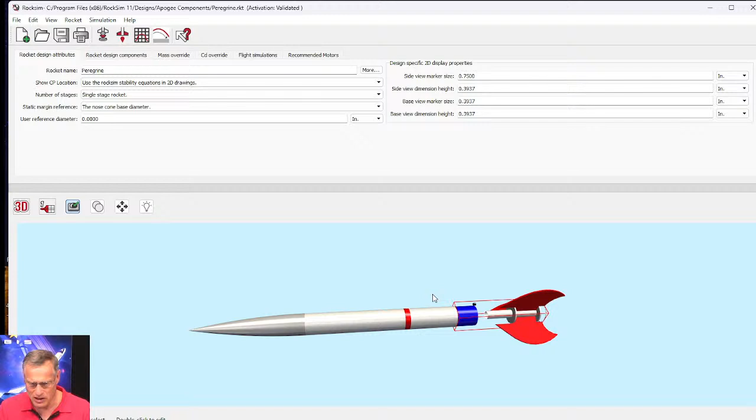While it's moving around, sometimes you might get these wireframe boxes - that's just your graphics card trying to keep up. Anyway, so this is a dual deployment rocket. I'll go back to 2D.

We've got 2 parachutes for dual deployment. The P right here is a parachute, and there's another parachute right here. If you click on them, you can see - that's a mass object, but this one right here is the parachute. So there's a mass object and a parachute, and probably the mass object is going to be like the shock cord.

You can tell that if you click on it, then come up here to Rocket Design Components at the top, click on that, and it will highlight what you're clicking on down here. So this tells me that this mass object is a shock cord. If I go to this one, that's also a shock cord. And if I click over here, this is a 48-inch parachute.

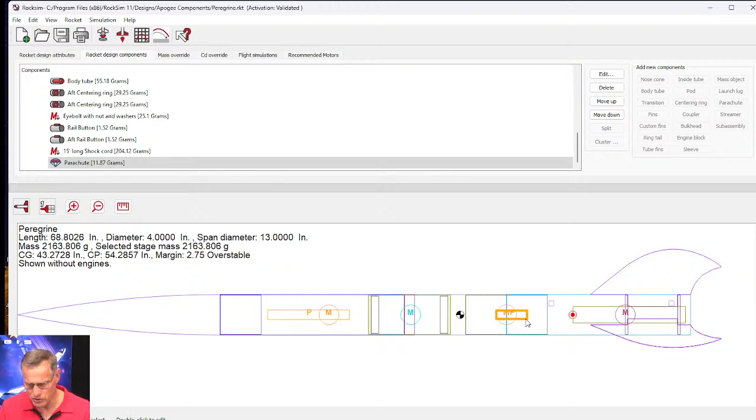And then this one over here is another parachute, but I don't know the diameter. So let me take a look at it by double-clicking it, and that will open up the editor screen. This editor screen will give me basic information about this parachute, and I can tell it's an 18-inch diameter parachute.

So I'm going to come up here and change the name to 18-inch parachute so that I know what it is. So when I go back to the parts tree right here, you can see, yep, this is an 18-inch parachute. That's going to help you a lot. So now we need to load an engine, because now we're going to set it up for dual deployment.

So we're going to load an engine. To do the loading of engines, come up here for the Prepare for Launch button, this button here at the top. It's like the bottom of the rocket with two arrows pointing down to the launch pad, meaning we're going to load it onto the pad. So click Prepare for Launch, and it brings up this screen.

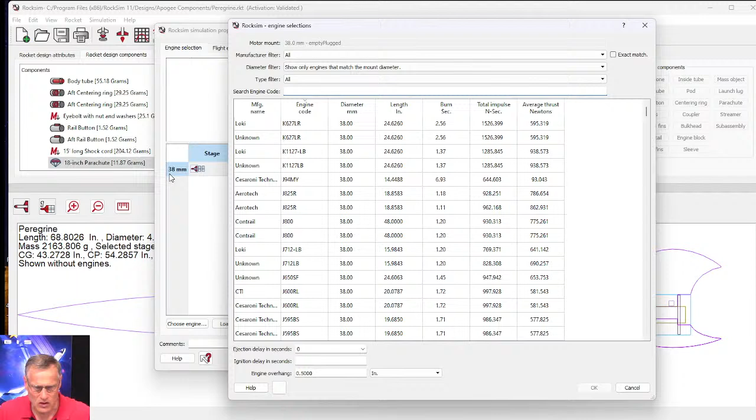Now we're looking at the back end of the rocket, and it's looking for a rocket motor. So if you look at the back end of the rocket, you say, how do you load a motor? Well, you come down here to this button that says Choose an Engine. You click on that, and it brings up a list of engines that will fit this rocket. If I look over here where this engine is going to go, it tells me it's a 38 millimeter diameter engine, and so it's looking at all the motors in the database that are 38 millimeters. I can scroll through them and just pick one.

Doesn't really matter for me for this, so I'm going to just choose this engine right here, a J570W. The W stands for white, so it's a white lightning motor, and it's going to give me a white flame.

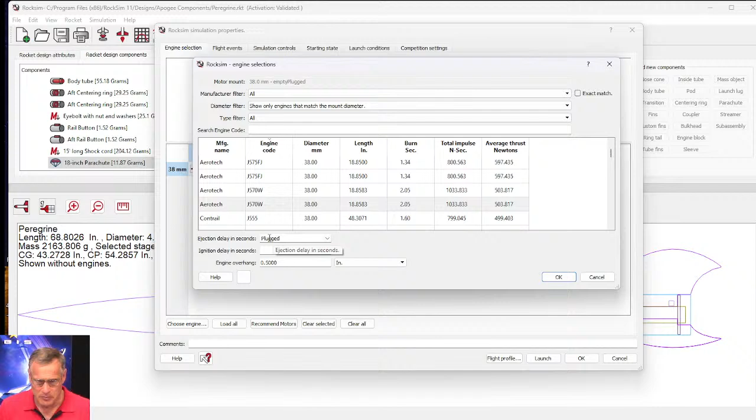And then I'm going to choose an ejection delay. For dual deployment, the altimeter controls everything, so I don't even need to have an ejection delay. So I could say plugged, or if I want to use the ejection charge as a backup, I can choose an ejection delay. But RockSim is going to ignore this once we set it up for dual deployment, so don't worry about it. I'm just going to choose plugged for right now. Plugged means there's no ejection delay. And then I'm going to click OK.

And it loaded that motor, and you'll see that the back end of the rocket is now filled. That brown spot right there, that's our rocket motor. We have the J570, and it says a 0-second delay, but I want it plugged, so there it is, plugged. And if you look over here on the side, it now shows that the engine loaded is a J570W-plugged, which is okay. So now we're ready to set up the dual deployment, and you do that in the flight events.

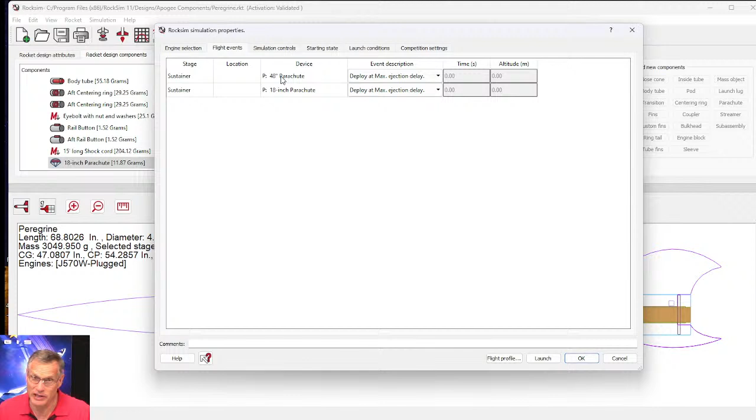So here in the flight events, I have two devices. I have a 48-inch parachute, that's our big one, and then we have our 18-inch parachute. And this is why I renamed it, because when I'm looking at these devices, I want to be able to tell them apart, because if they're both named parachute, I don't know the sizes.

So our smaller parachute is our drogue chute, and we want it to come out at the top of the flight trajectory. That's called the Apogee point. So I'm going to go here to the description for that event - this is like the triggering event, what causes the parachute to come out. I'm going to click on the drop down, and I want to choose Deploy at Apogee. So this parachute is going to come out at Apogee.

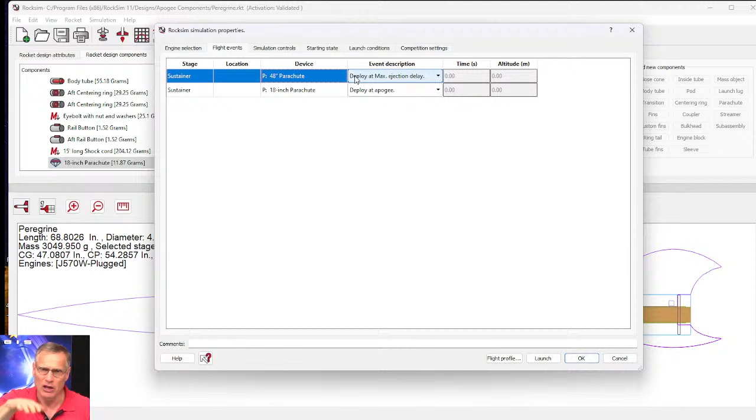And then this bigger parachute, we want to deploy that one at a lower altitude. The purpose of dual deployment, as you know, is to save us from walking a long way. We want the small parachute to come out at Apogee so that the rocket will fall fast until it gets to a lower altitude, and at that point we want it to fall slow. Once it's falling slow, the wind is going to start carrying it, so the lower it deploys, the shorter distance it's going to drift. And we can tell that by this right here.

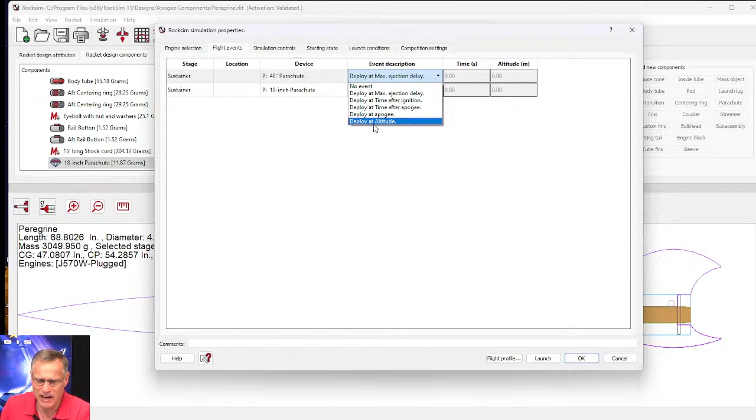So we're going to go to the event description again, and we're going to set it at an altitude - deploy at an altitude. If you come over here, you'll see that this box is now activated, and I can type in my altitude. Right now I'm in meters, so I'm going to say 100 meters, which is a little over 300 feet. You can change the units, and I can show you that if you're interested. So this parachute is going to deploy at 100 meters.

And now we're ready to launch. We've set up dual deployment. Dual deployment is now set up. Now we need to go launch.

So I'm going to look at my starting state. My launch guide length - this is an 8-foot launch rail, so I'm going to type in 98 inches for the length. And if I change that to feet, you can see that's 8 feet, 0.166. I think it should have been 96 feet - 96 inches.

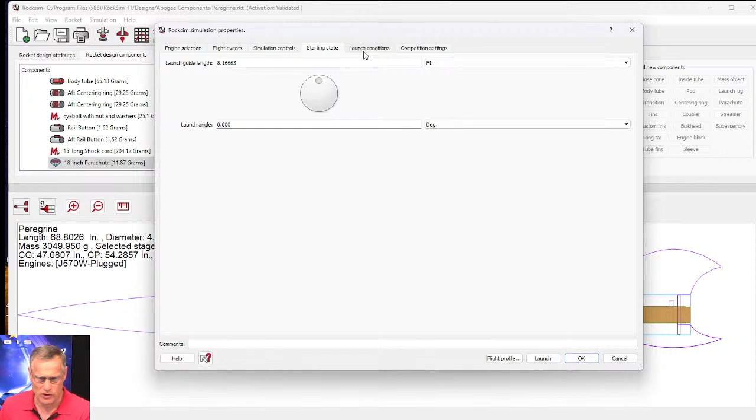We're going to go straight up, so our launch angle is 0 degrees, pointing straight up. Under launch conditions, we're at an altitude of 700 feet, standard atmosphere day. We do have wind, 8 miles an hour. This one should also be 8 miles an hour. So if both the low wind speed and the high wind speed are the same, that means it's a constant wind speed, not varying between fast and slow. So we're going to say constant speed, 8 miles an hour.

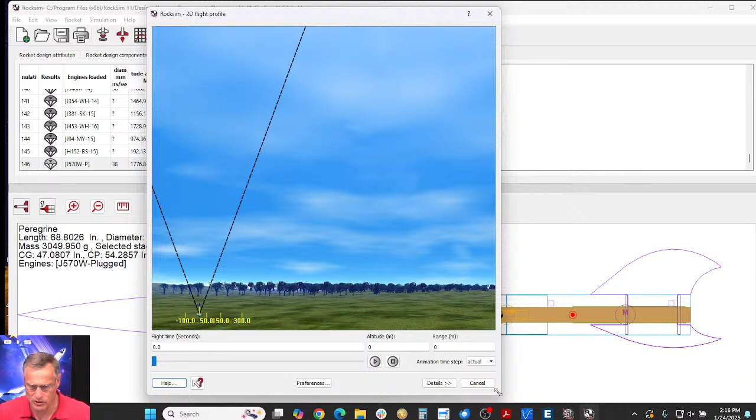All right, so now we're ready to launch. We'll hit the flight profile and run the simulation, and now we're going to look at the trajectory of the rocket. We're kind of looking at a side view. Here we are on the launch range. Our rocket is down here, and it's going to launch up, and then the wind of 8 miles an hour is going to make it drift this way. You can get a hint on how far it's going to drift by looking at the units down here, 300 meters, I assume that's meters.

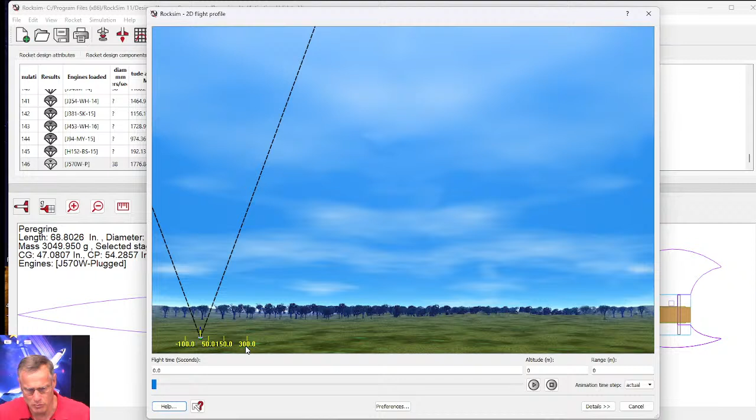We hit launch and the rocket's taking off. This is smoke, so it's burned out now and it's coasting. When we hit apogee, we should see a parachute pop out. It's getting close to the top, and right there's apogee. Now it's a small parachute, and it's going to drop fast until it gets to 100 meters. So if you look down here at the altitude, when we get down to 100 meters, that big parachute should be coming out. That's 48 inches.

I'm going to speed things up by grabbing the slider bar: 600, 500, 400, 300, 200, and then 100 meters. At this point, the parachute should have kicked to the larger one. If you look at that trajectory, you can see that now it's changed. It was coming down at this angle, and then it switched to a shallower angle. That's an indication that something changed. Each of these dots is one second apart. If you look down here, all those dots are just compressed together, which means it's falling really slow. So that tells us that the big parachute is also out at this point.

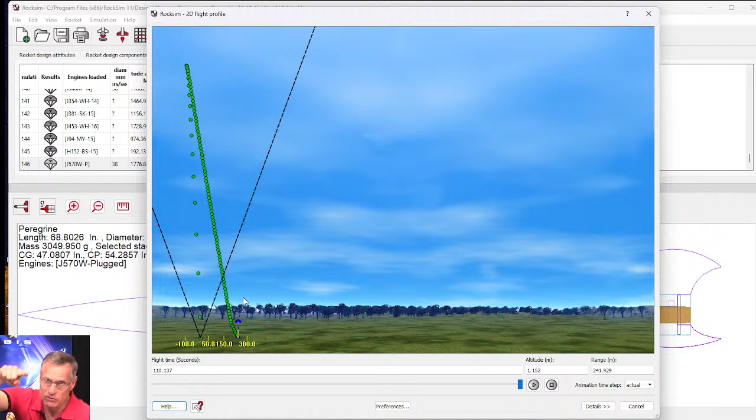So this is the traditional, typical dual deployment trajectory. That's what it looks like. It goes up, it comes down fast, and then when it gets closer to the ground, it starts going more sideways because the wind is pushing it. So that's setting up dual deployment. It's not hard, it's pretty easy to do.

All right. Okay, so hopefully...

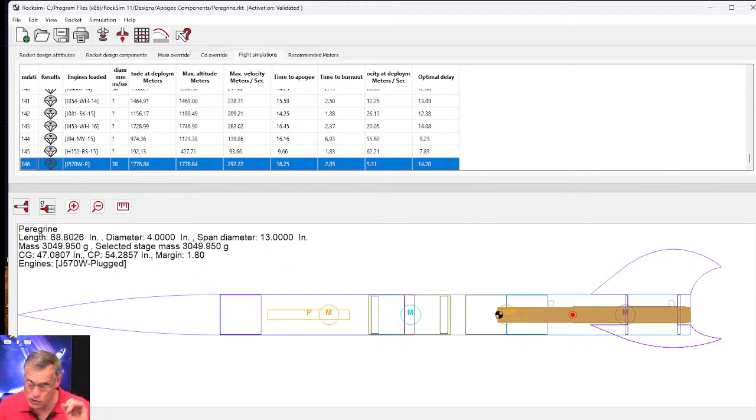Jazzy Engineer MC, hopefully that answers the question about dual deployment. If you have any additional questions, go ahead and type them in and we'll try to answer them.

Okay, Purple Haze, let's see, did he type in anything else on his complex fin shapes? I don't see anything. So this design that I have here, this is what I would consider a complex fin shape. Was he trying to export it or print it?

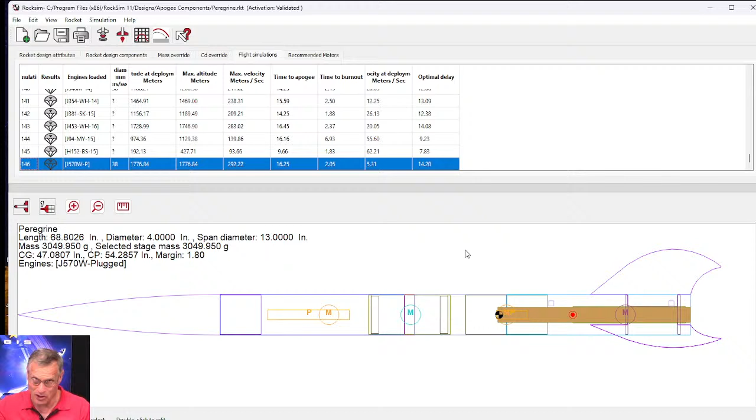Okay, so if you want to, there's a difference between exporting and printing. Printing is you want to send it to a piece of paper. Exporting means you want to use this in another program. Like we use it all the time here at Apogee to export a fin shape so that we can cut it on a laser machine. The laser needs a vector image, a mathematical representation of the fins. Each corner has an XY coordinate, whereas on a piece of paper, you don't really care.

So to export, what you do is first you need to find the fin. I'm going to click on the fin, highlight it here, then come back to Rocket Design Components. You'll see that the fin is highlighted. Then I can double click on it.

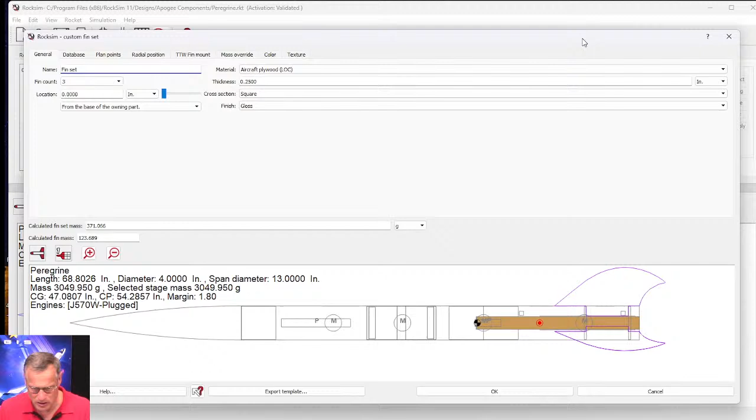And it opens up this screen. I want to make it a little bit smaller, because down here at the bottom is a button called Export Template. If you're not seeing that, this is the button you want to click.

And if you're not seeing it, I'll show you how to turn it on. If you click on it, it will bring up where do you want to save this fin shape. So I'm going to call it the Peregrine Fin Set, and the format is .svg.

SVG is Scalable Vector Graphics, so this is a vector drawing.

Our other option is STL. An STL is actual 3 dimensions, so if you wanted to send it to a 3D printer, this is what you would choose, that STL file.

In some cases it's pretty cool to export as an STL because there's a reason you might want to print it. But for now, if you just choose SVG and then hit save, I'm going to throw it on my desktop so I know where it is.

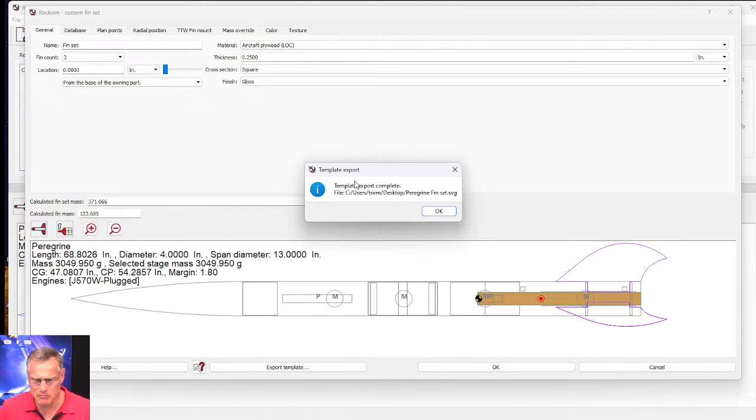And hit save. Okay, and then you get a message saying yep, it exported the template. So now it's exported.

Unfortunately, okay, let me close this. Save my changes? No. That's RockSim Pro. Okay, so here on my desktop, date modified, Peregrine Fin Set.

It looks like it's like an Azure file or Microsoft Edge, but it's not. This is a scalable vector graphics file, and you're going to need to use a vector graphics program.

If you don't have one, there's a program on the internet called Inkscape, and it's free. You can open these files in Inkscape. I think it's starting Inkscape.

Okay, come on, did it open? Open.

I guess it was opening. Now I'm going to open it twice.

Okay, so this is Inkscape, and I'm not an expert in Inkscape, but I can open a file. So go here to File, Open, and I'll look on my desktop. Here's the Peregrine Fin Set, and you'll see there's the shape. Click Open, and that is our fin, and this is a vector drawing.

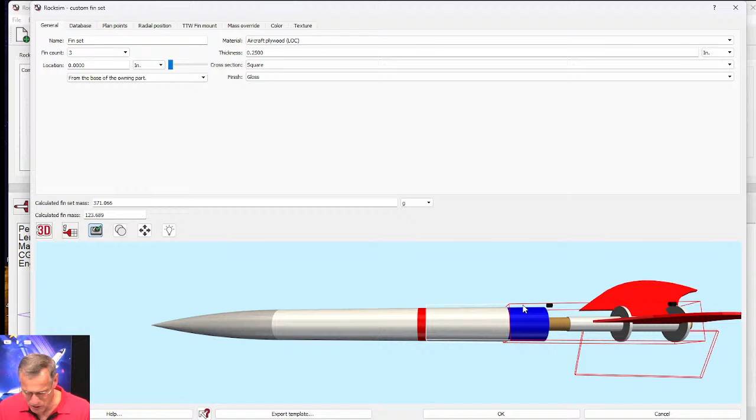...you'll see that right now the edge is square. So it's not an airfoil, this is just a flat, square airfoil.

But in RockSim, you can change the cross section of the airfoil. So if I choose rounded, when I choose it, watch this edge right there.

See, now it's rounded, and I can also choose airfoiled. And you see, it's different.

It's got a little bug in here. I got an error, but it's more airfoiled now.

The airfoil works better on trapezoid fins. When you get to really complex fin shapes like this, rounded works okay, and the square edges work okay too.

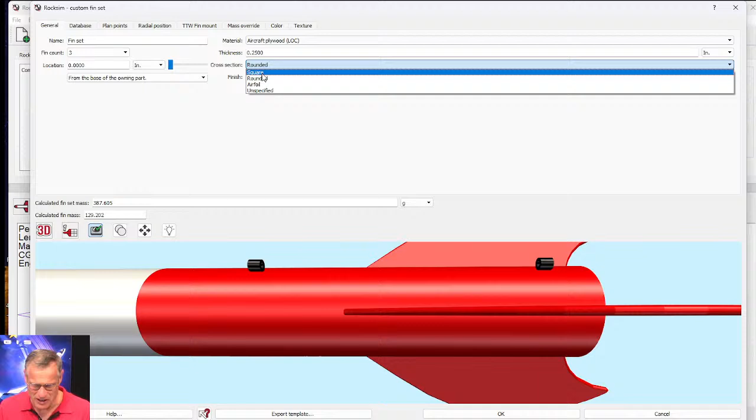But if you print these, you can export this as an STL file, and then you can also save it onto your desktop.

Here's my desktop. FinSet STL, hit save. I don't think on this computer...

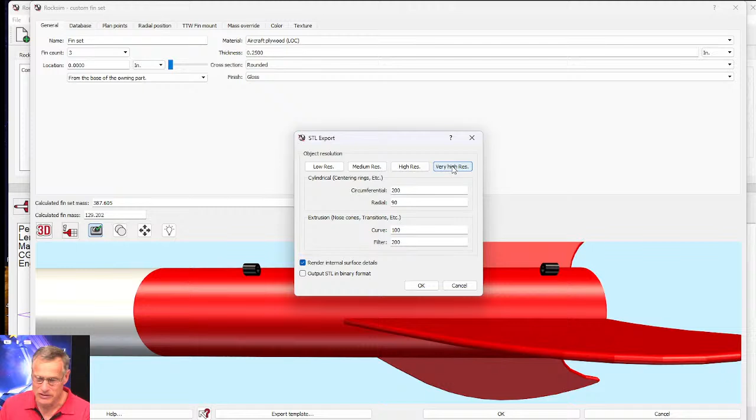Okay, so when you go to export this, you're going to get some options for low resolution or high resolution. Just click on very high resolution, there's really no reason not to. And then click OK, and it says okay, we exported it.

And it will be on your desktop. Save my changes? No. Let me go back to my desktop and see what's on there.

Okay, it's right here. And if I click on it, I don't think I can open this because I don't have a program here that will open an STL file.

But if I had a 3D printer, I could export it, you could open it in that, and see it and do something with it. So now I'm stuck here.

Just once. I don't know what's going to happen when I open it. Couldn't read it. Okay, that's what I figured.

All right, so that is how to export a complex fin. If you wanted to print it, you go back to RockSim. Printing is a little easier. Just click on the print button up here. And then I want to export out templates. I'm going to uncheck this one here. This one has to be checked. Then it has to be fin set. And I'm going to uncheck that.

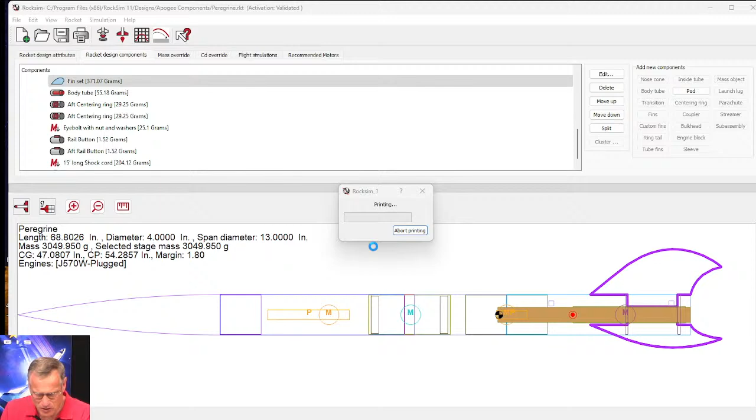And then under additional settings, you can send this to a PDF. So I'm going to send it to a PDF because I'm not hooked up to a printer. So when I do that, this is a PDF printer. And I'm going to say print. I don't know where it's going to go. Okay, so now it's asking me where I want to save it. So I can save it to the desktop.

All right, so I assumed it saved it. Go back to my desktop. Date modified. FinSet. And if I open that PDF, yes, you can see this is too big for one single 8.5 by 11 page, so it tiled it. And then it put in these registration marks on the corners so that when you print it out on real paper, you can line up these corners and splice your fin back together like a puzzle. So you have a full-size fin template. So that is printing a fin, which is different from exporting it as a vector.

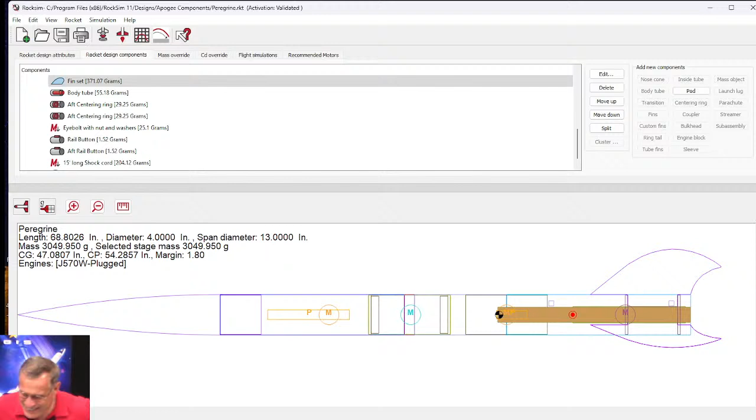And then now he says it's working the way he wants. Good. Reggie Morrow is here, and he says, greetings, Tim. Happy New Year from Cedar Rapids, Iowa. Cool. Well, welcome, Reggie. Jason Horstman is here, and he says, hi Tim, I was late today. Were you ever early? It's a name I don't know. So welcome, Jason, I'm glad you're here. Carlos K. from Marietta, Georgia is in the house.

Fatbank says, how do plugged and zero delay motors differ in RockSim? Okay, that's a good question.

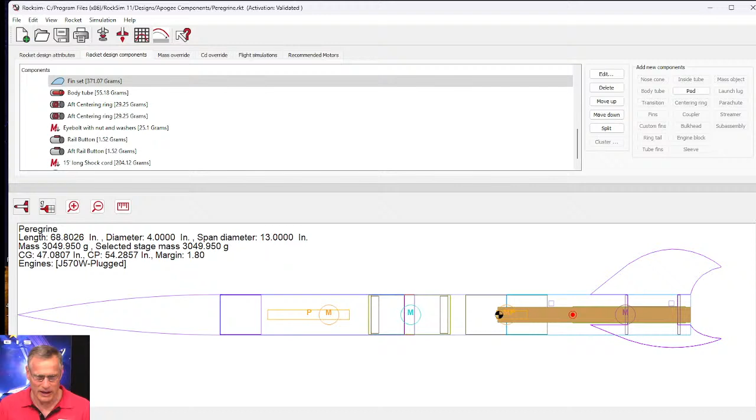Let me see. RockSim and RockSim Pro are the same. And I already have a 2-stage rocket loaded here. So I can show you the difference between a 0-second delay and a plugged motor. So again, we're going to load engines, and this is looking for 24 millimeter motors. So I'm going to choose an Estes D12.

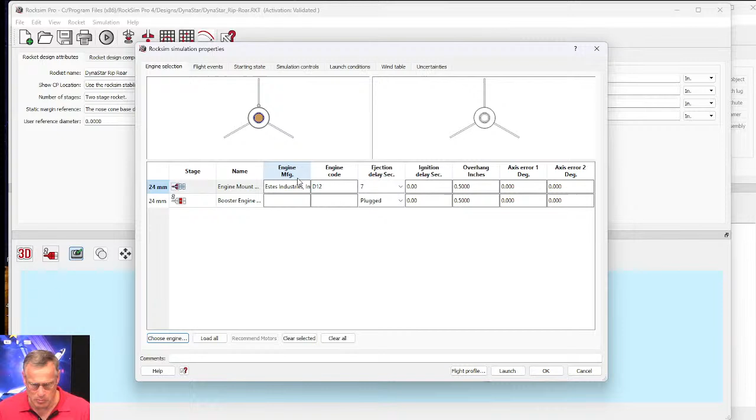Okay, so one of the motors, I'll choose a 0. I better choose a long... this is the upper stage, so I'll make it a 7-second delay. So in the upper stage, it's a D12-7. This is the upper stage, this is the booster stage. So on a typical 2-stage rocket, Estes style, we want the motor from the bottom to ignite the motor in the top.

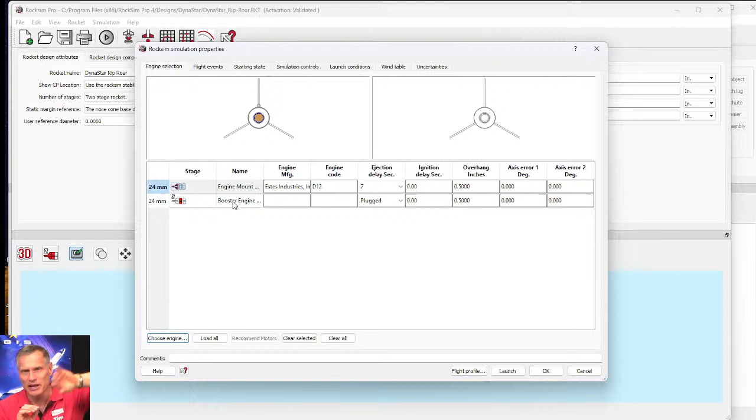For that, you need a 0-second delay. Because what happens is when the propellant burns out, it throws hot gas and burning particles up into the nozzle of the upper stage, and that's what ignites it. So you need a 0-second delay. So I'm going to choose an Estes D12-0 for the booster stage.

And so for the parachute, I'm going to say maximum ejection delay, starting state. This one I'm going to make it a 60-inch launch rod. And it's ready to launch, so I'll go ahead and launch it, and we'll look at the flight profile.

One new motor mount, these have been added to the simulation. Okay, what happened? Choose engine, D12-0. Okay, so the upper stage is a D12-7. Flight profile. Okay, it's working this time. It went 1,131 feet. I saw that because I was cheating, looking at the latest simulation down here.

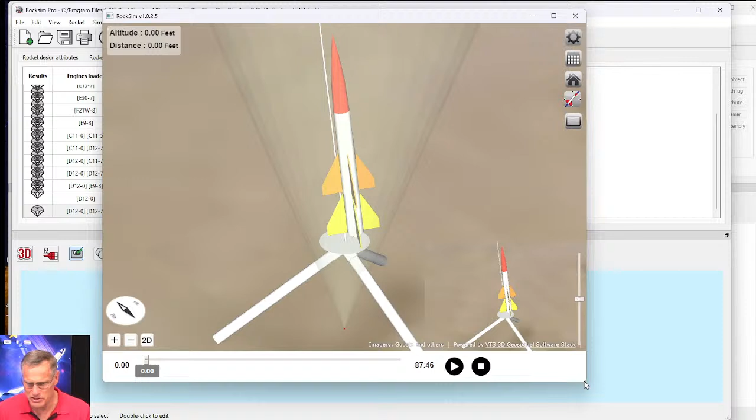So now we're going to look at a flight profile. And this is the launch visualizer, and it's different from RockSim. So in RockSim Pro, it's 3-dimensional. And you can see here the rocket is sitting on the launch pad, and I can rotate the rocket around. Down here is called the mini view.

I'm going to turn that off. This cone right here is the weathercocking cone, and I'm going to turn that off as well. So I went to the preferences button here at the top, and I'm going to come down to display, find the weathercocking cone, turn that off, and turn off interval points too.

So what we should see when the rocket takes off, let me zoom out by hitting the minus button so you can get an idea of where we're launching from. This is our launch site in Pueblo, Colorado. You can see there's not a lot of trees here, but in the distance you start seeing some mountains and valleys.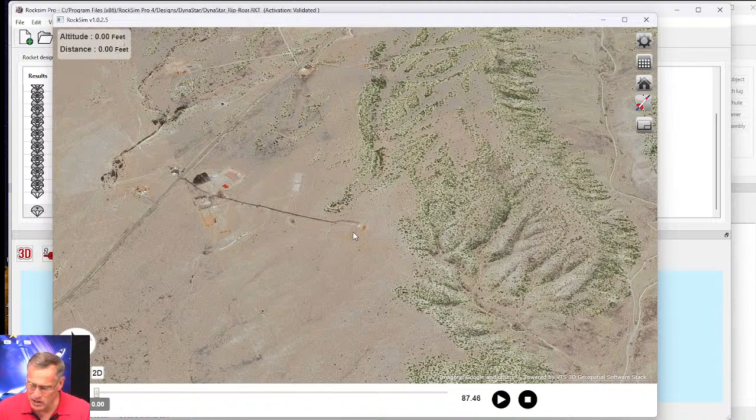And this is 3 dimensions, so if you rotate it around you can see things differently. But our rocket is right here where my cursor is. I want to zoom in a little bit closer.

Okay, so here's the rocket. Let me check one more thing - this is a multi-stage rocket, and I want to make sure that's turned on. I also want the trajectory to be yellow so I can tell it apart. Okay, so again, our rocket is right here.

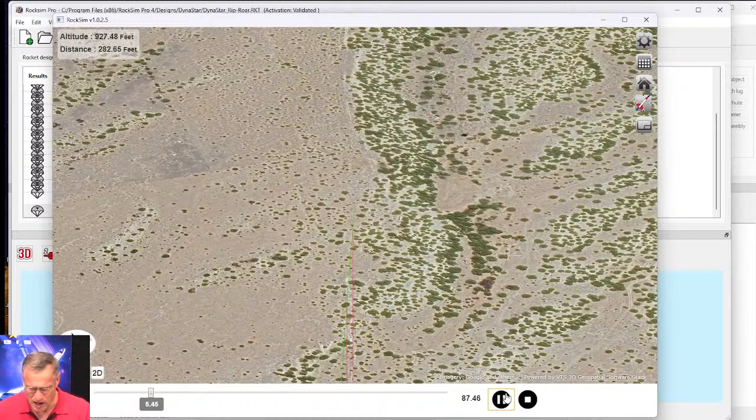And when I launch it, the rocket's taking off. It went up and it happened so fast you didn't even see it. So let me zoom in to where the rocket is. The rocket's coming over the top, and now the parachute's out.

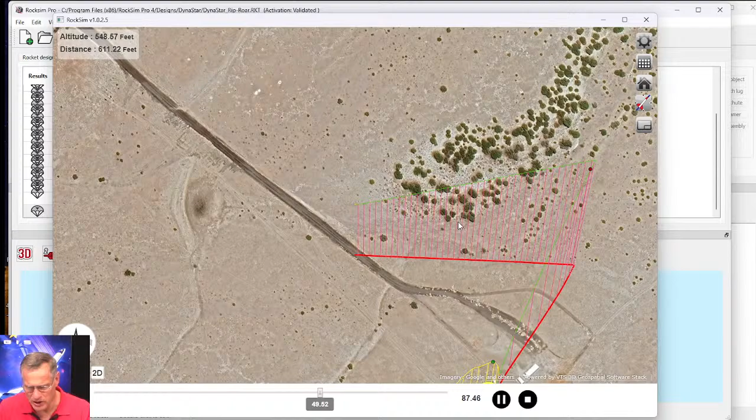This green line is the trajectory line of the rocket in the sky, and these vertical red lines are like drawing a line from the trajectory back down to the ground, because as I said, this is 3 dimensions. So if we want to know where the rocket is relative to the ground, this gives like a curtain. This red line on the bottom is the trajectory along the ground, the green line is the trajectory in the air, and these pink lines are like a sheet or curtain drawing lines from the trajectory back down to the ground. So that's all that it is.

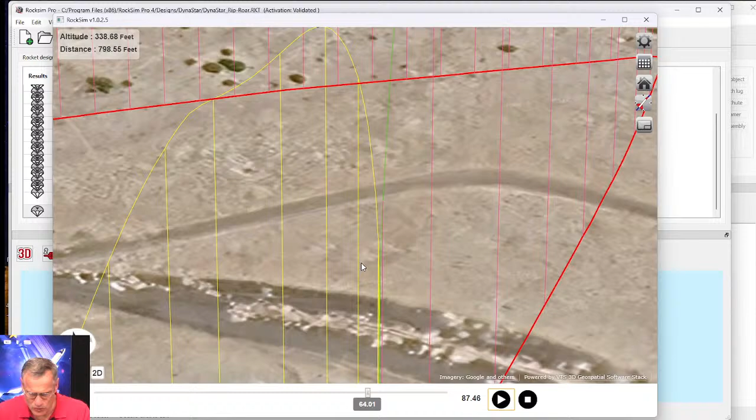The yellow over here, let me pause it, is the booster stage. So the booster stage fell off the rocket probably somewhere right there. If I zoom in right there, you can see where the yellow line and the green line intersect - those are the stages when they're together. When they're separate, the booster is separate.

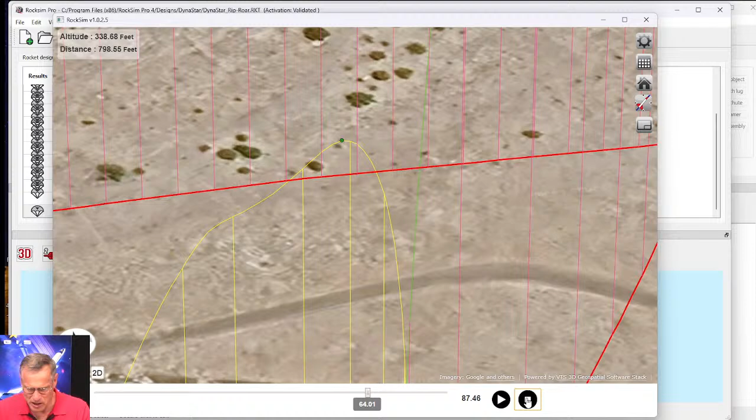So let me go back to the beginning and slow this down to look at it a little closer. The rocket's taking off. Right there, the booster stage fell off, and that's because it has a 0-second delay. So as soon as the bottom stage burns out - if I look closely, you can see there's flame coming out of the booster stage - it's still burning, but as soon as it stops burning, the upper stage lights. That's what a 0-second delay is.

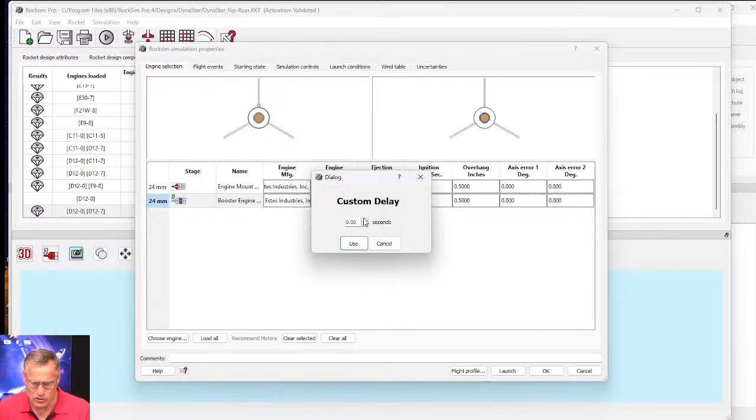So if I change that to, say, a 2-second delay, we can do that here. I'm going to go back to prepare for launch, and that booster stage, if I drop this down, I can make it a custom number - I'll say 2 seconds, so it's a 2-second delay. Now the only thing that's changed is I went from a D12-0 to a D12-2 in the bottom stage.

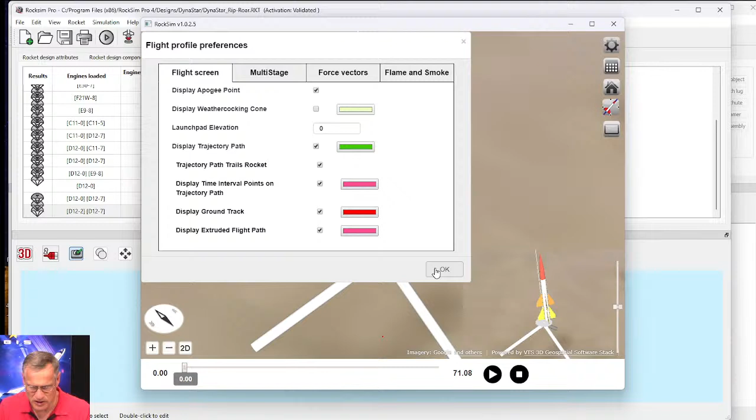And if we launch it again - I've got to turn off the weathercocking cone, it gets in the way - the rocket's going to take off.

Okay, so right at this point, at one point between 1.61 seconds and 1.81 seconds, a 0.2 second difference, the motor had burned out, and now the rocket is coasting. It's together, and it was like...

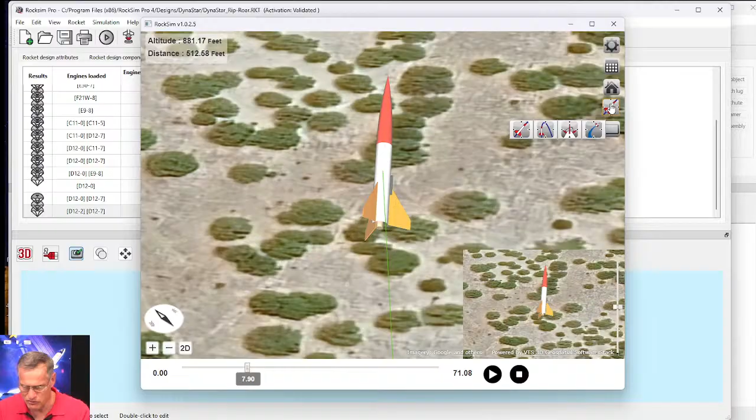1.81 seconds. So if I add 2 seconds to that, it should be 3.81 seconds. If I move the slider bar to 3.81 seconds, that's when the booster stage should be igniting the upper stage - right there. Now you can see the rocket has coasted, and the upper stage will coast further. If I zoom out and look at it from a side view... let me zoom in.

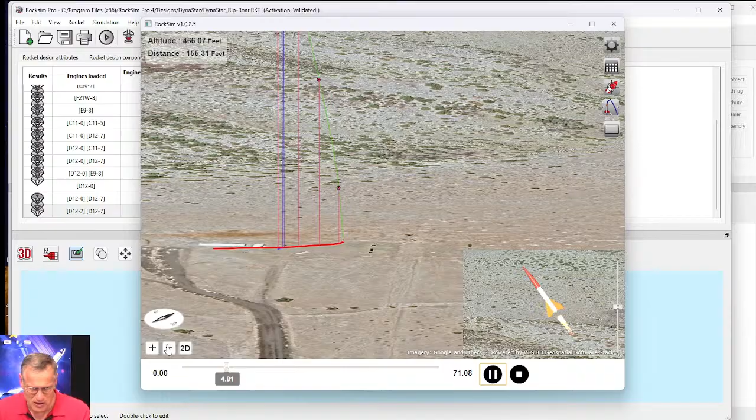Okay, so our launch pad was right there. So there's the rocket. When it takes off, you can see it's going up, and it's putting down a dot every 1 second in the flight, so you can see what the trajectory looks like. What this allows you to do is compare one flight to another.

In fact, I'm going to show you something we're working on right now. This is a new feature I just got this morning, a very cool feature where we compare the trajectory of one simulation to another. To do that, I'm going to highlight both simulations. Here's the D12-0, here's the D12-2, and now I'm going to hit the flight profile button again.

It says unable to process. What? Why not? Oh man, it's not working the way I wanted. Nope. It was working before, it worked this morning, but it's not working now. All right.

Well, anyway, so that's what we wanted, to compare two simulations and see what they look like. But I can look here: from the first simulation, when it was a D12-0, we went 1,131 feet in the air. When it was a D12-2, in the booster stage we lost altitude, so now we're only hitting 939 feet. Why did it go lower? Because as the rocket was coasting, with both stages together, it's carrying up that dead weight of the booster stage. That booster stage has weight and it's slowing the rocket down. At the same time, the wind is hitting the rocket and causing it to arc over. So it's slowing down and arcing over, so it doesn't reach the same altitude.

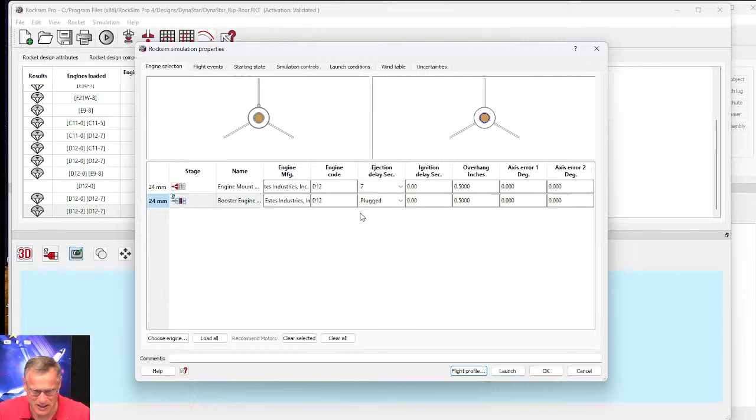Let me click OK. Let me clear out this bottom engine — clear selected. And let me take that upper stage and make this one plugged and see what happens. And it's giving me this weird error. Let's try it again: D12 plugged, flight profile. Why is it giving me that? I'm not sure, let me go. But plugged means it's not going to ignite it.

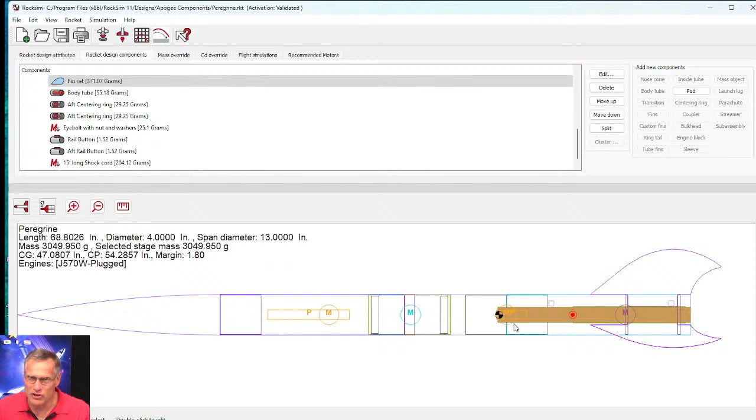Setting up a Jolly Logic is exactly no different from setting up dual deployment. The only difference is there's extra mass inside the rocket for the device itself. So if you wanted to set it up, you would say, okay, I'm going to put my chute release in this tube, and I'm going to call it a mass object because I don't know the shape of it.

Let's see, is there a... it's not in the database. So you could call it a chute release mass — that's all it is, a mass. And you can specify, I don't know what they weigh, but you can look on the Apogee website. So if you go back here to the Apogee website, Apogee components, and search chute release.

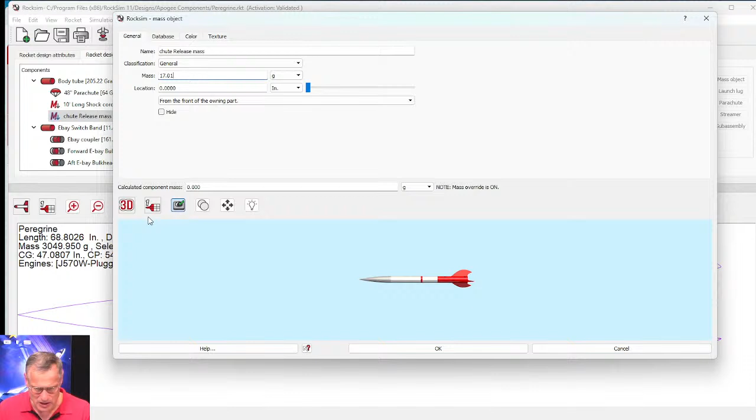There it is. Click on it, and it tells me the weight is 17.01 grams. So if I go back to RockSim, I'm going to say 17.01 grams, and then you have to specify the location. Right now the location is right there, but I'm going to slide it back to right here. Click OK, and that's it.

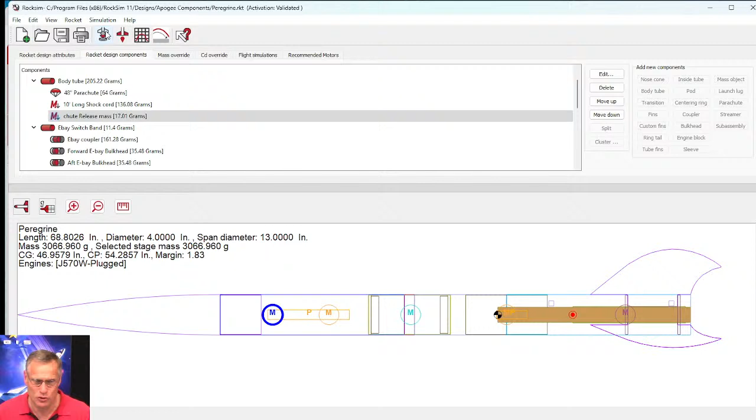Adding the mass, it's only 17 grams. In this rocket, which weighs over 3,000 grams, it's not going to make much difference. But setting it up, as far as the simulation, set it up just like a dual deployment, which is under flight events. You specify when the smaller parachute opens, which is at Apogee. That's controlled by the ejection charge of the motor. And then the chute release controls when this deploys, and again it's set by altitude. So you set it to deploy at altitude, then come over here to the column of altitude and type in a number there, and then it will deploy it there.

Carlos says, Tim, I spent 20 minutes describing RockSim in my hobby town to a 3D print enthusiast. Please consider making a video of that sometime. I just did.

Reggie Morrow says, is there a free demo of the visualizer that we can download for a trial basis? The answer is yes and no.

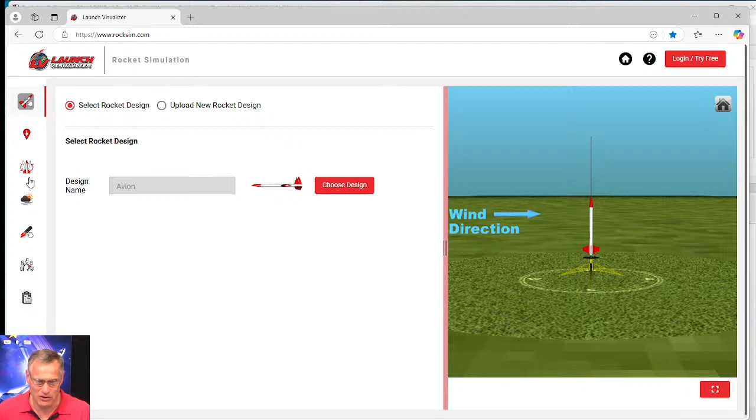If you come here to the Apogee website, or in any browser type in rocksim.com, this will load a launch visualizer, and this is free. There's three different types of accounts in the launch visualizer. There's the free one, which you don't have to do anything. I can choose a design, and I can choose a Skymetra kit, select it, and then I can choose a launch site, and it's blacked out because I'm on the free version.

I can't control anything except for a launch angle. So I'm going to choose a launch angle, and I'm aimed to the north. And I can't set any wind except for a steady wind, and that's even locked out, so I don't think I got any wind. I can choose rocket motors, but I can only choose up to a D motor for free.

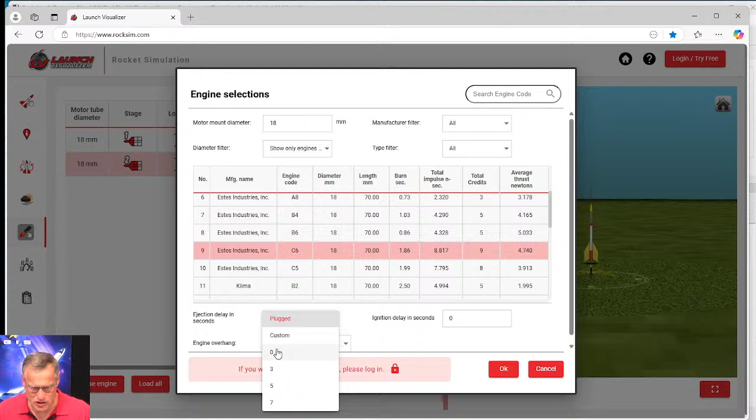So I can choose a Quest D20. This is the upper stage, so a D20-8. And in the bottom stage, I can choose maybe like a C6-0. Just like RockSim, you're choosing the ejection delay. So I chose my motors. I got a D20-8 in the upper stage and a C6-0 in the bottom stage.

And I can choose launch. And it says I'm not a robot. And simulate. Okay, and it shows our launch site.

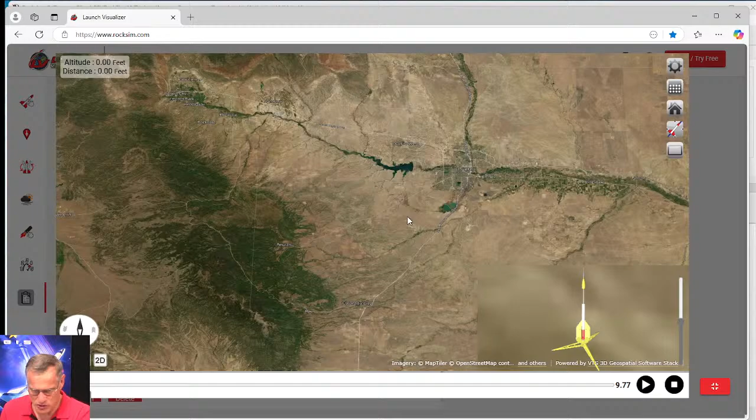And if you look at this launch site, or the launch location, this is our launch pad here in Pueblo, Colorado. You can zoom out, but you can't change the launch location. So I'm looking at, here it says Pueblo, Colorado, and I can orient the map, so north is pointing straight up. If I continue to zoom out, you can see the United States there. So you can see my launch site is right there in Pueblo. And if I hit the home button, it'll take me back to the launch pad.

And then if I push play, you can see the rocket taking off. You can see the booster stage dropped away and the upper stage is coasting. But it will stop right at Apogee. So right there is Apogee where the parachute came out. But that's the free version, so the free version stops at Apogee, but at least you can play around with it.

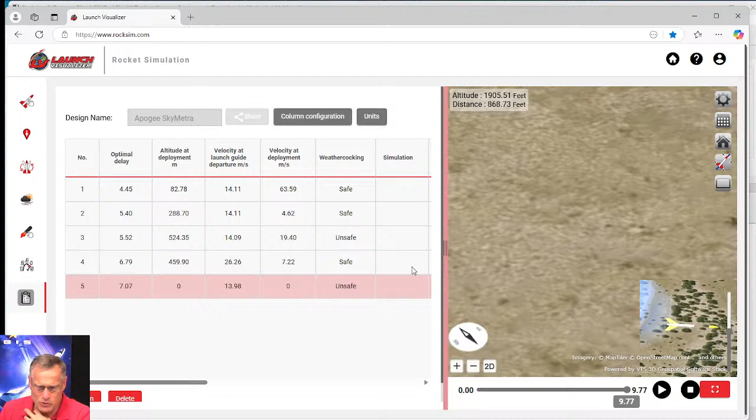So now if I log in, you can log in and you can create an account, and you have to set up your own password. Once you created an account, now you have control over more things.

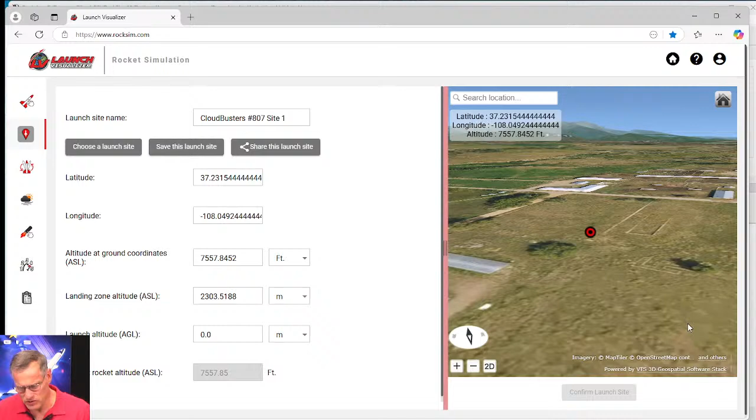Like now I can choose a different launch site, and I'll choose Cloudbusters. I don't know where that is, that's in Colorado, I think, as well, but I think it's near Durango. So I can see some mountains in the background there. And if I zoom out, so that's my launch site. And again, you could just hit launch. I have to set up my engine info. Oh, it switched back to the Avion because it logged me out and then logged me into this account.

I'm on it as a premium member. So there's the free account anybody can use, and then once you create an account, you can launch up to a G motor, and you can also, I think, pick a launch location. I think.

The reason you have to create an account is because now you can save designs into your account. So if you have a RockSim file, you can upload it into the account and then run simulations with it. So where do you get RockSim files?

Well, you go back to the Apogee website. I need a new browser window. On the Apogee website, I can go shopping, look for a rocket kit, and let's say maybe I wanted this Argo D4 Javelin. If you come down here, there's a RockSim file. Click on that, it will take you down to the page, and you can download the RockSim file.

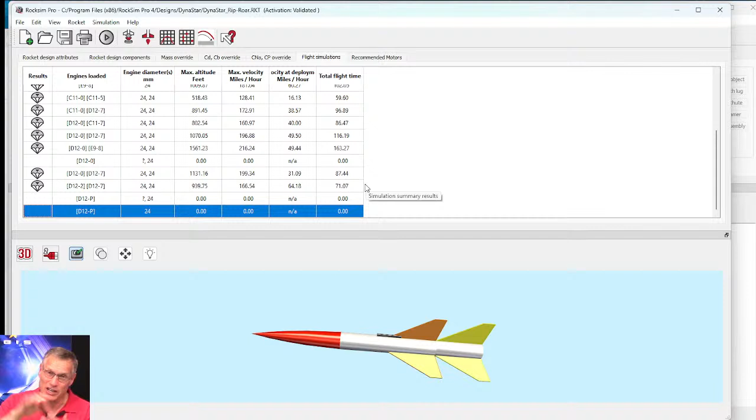So that's the launch visualizer. If you want to try it out, that's what I would recommend. Now the one in RockSim Pro is not free, and we don't have a demo for that because there are actual reasons for that. It's pretty sophisticated, and there's a free demo of RockSim. The free demo will allow you to design rockets, and you can upload them to the visualizer and run the 3D simulations there. If you want to do high power, get RockSim and the launch visualizer premium, and you can do most of what RockSim Pro can do, although RockSim Pro will have these new features we're working on.

Carlos K says, actually make a part and show the process, a good pro and con discussion of why thick, heavy plastic parts may be a bad idea. Well, yeah, thick plastic parts can be a bad idea. That's kind of the rage right now, everybody wants to 3D print a rocket. And yes, you can do it, but they turn out to be heavy because the density of plastic is greater than the density of paper and balsa wood. So the rockets are heavier, they don't go as high, they don't go as fast, but you can make some pretty interesting designs. So there's advantages and disadvantages.

He wants a video on 3D printing a rocket. I would print parts from RockSim, like 3D print nose cones and 3D print fin shapes and maybe transitions. But 3D printing a tube, you can add a lot of weight really fast with a tube. RockSim is not a CAD program, although 3D printing an airfoiled fin is something that is really difficult to do in a CAD program, because I've been trying.

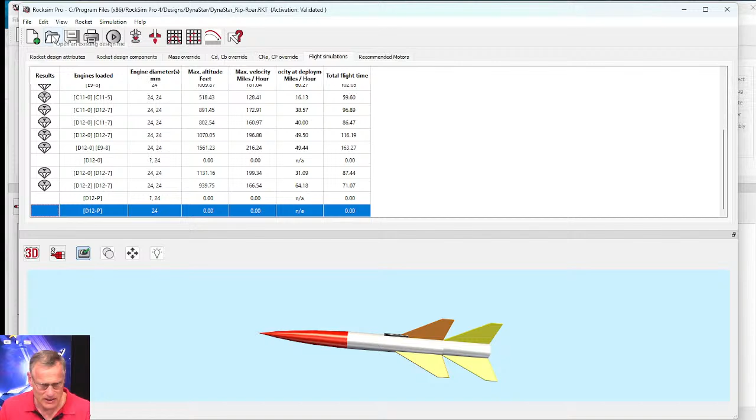Reggie says, I'll just get Pro, thanks. Good. One of the things about getting Pro, we're going to release new features as soon as we make them and as soon as they're stable. One of the things I was trying to show you is to be able to do 2 simulations at once. I wonder why I couldn't do it. Maybe it doesn't work for 2-stage rockets. Let me open up a single-stage rocket.

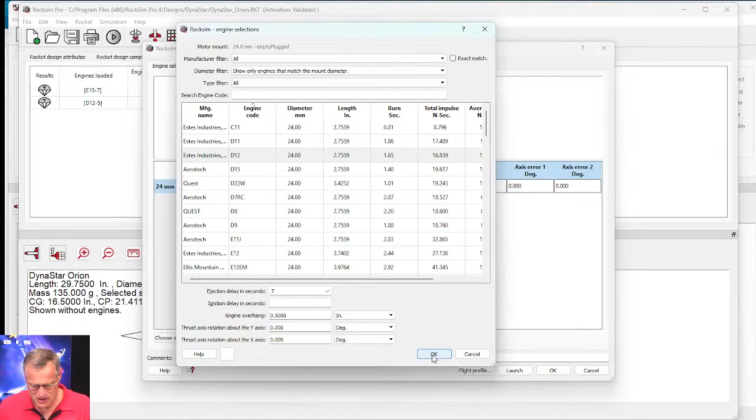Maybe that's it. Do you want to save your designs now? Okay, so here, let me run 2 simulations. D12, 7, and flight events, we'll deploy it at engine ejection delay. In the starting states, we'll launch it straight up. And for launch conditions, I'm going to choose a launch site, this one in South Carolina. Wind table, I have a 5-mile-an-hour wind coming from the west. So we'll hit flight profile and see what this looks like.

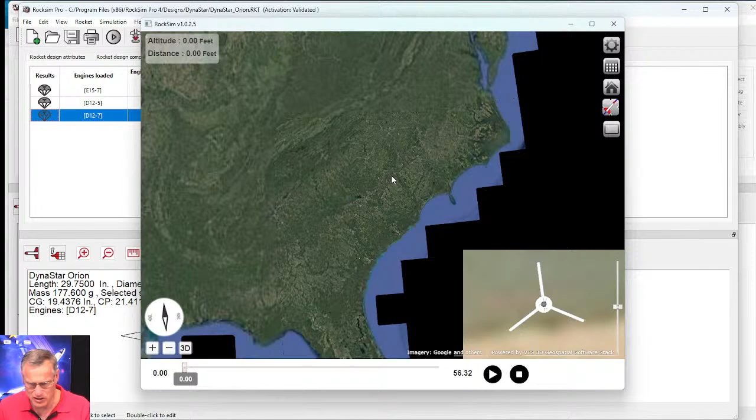Okay, so there's my rocket. Let me zoom out so you can see where we're launching from. This is South Carolina, so it's got a lot more trees than Colorado, a lot more rain there. So my launch site is somewhere right here, I'm looking straight down on it. If I zoom out, you can see that yeah, this is South Carolina. And if I zoom back in, okay, so my launch pad is right there. And now I'm tilting it, so we're looking at it not quite a bird's eye view, kind of like off to the side.

And if we launch it, the rocket's taking off. Every second it lays down a dot. The rocket goes over the top, and now it's drifting down. So the parachute came out about right there, and now it's drifting down, and it's going to land way over there. Okay, so that was with a D12-7 launching straight up with a 5-mile-an-hour wind.

Now let's change this, and let's say it's the same thing, D12-7, but instead of being launched straight up, let's give it an angle of 13 degrees to the southwest. This is like a compass, so north is here, east is off to the right, south is down here at the bottom, and west is this way. So you can see I'm kind of aimed between south and west at minus 150 degrees on a compass. And let's launch this flight profile, and again, we're at the exact same launch site.

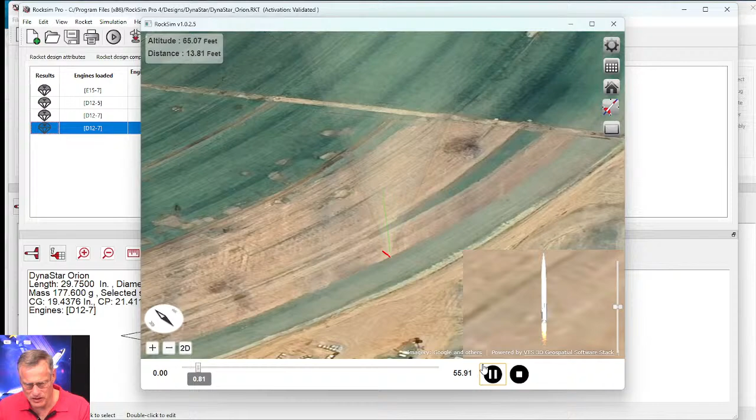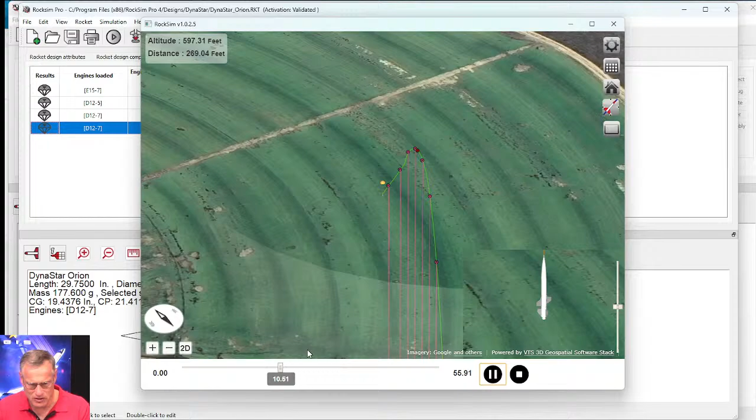So let me zoom out. And we launch it, and the rocket takes off. So this time we aimed it to the south a little bit, and it arced over, and the parachute came out. And when we look at it, it came down right there.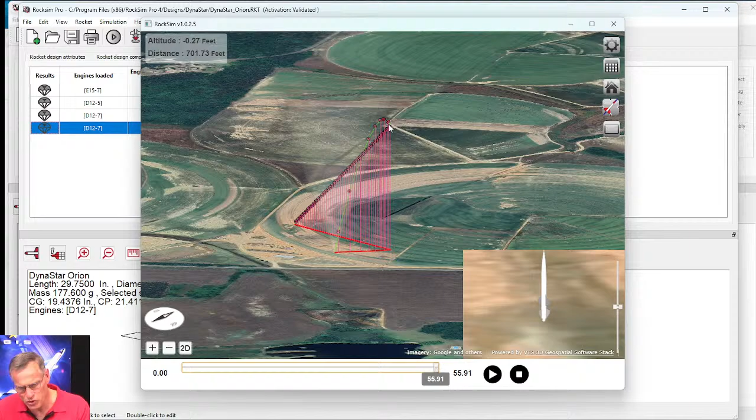And if we zoom out, okay, so now on this one, you can see before we were along a trajectory like about this, because it went straight up. This time we angled it, and when it took off, it angled to the south. So north is the blue or black arrow, and south is the white arrow, kind of up towards this corner if you're looking at this map. So it angled to the south, the launch pad was right there, it came up this green line to the south, it arced over, then the parachute came out, and we have the wind coming out of the west.

So if I change it to the north, now we're looking at the north, and you can see that right here is where the parachute came out, and it just drifted to the east because the wind was pushing it. All right, so that is those two simulations, and what I wanted to show before is a comparison.

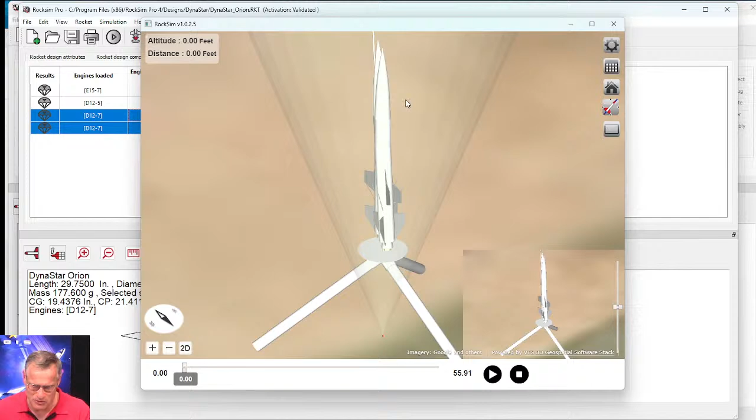And this time I think it's going to work. So now we're going to see those two flights side by side, so we have two rockets sitting here on the pad. One of them is aimed to the south, and one of them is going straight up. And they're meeting right here in the middle, so it kind of looks like a Siamese twin rocket, but these are actually two individual rockets launched from the same point, but they interfere with each other visually.

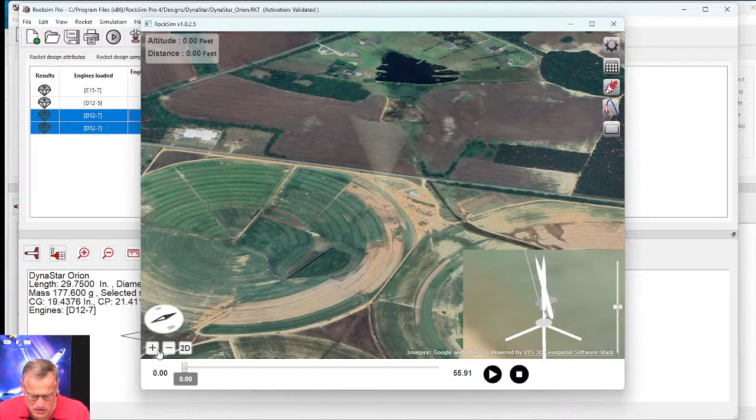Let me zoom out a little bit. In fact, let me go to a trajectory view, and let me zoom in a little bit. Let me turn this off. I'm going to try, I better see. Okay, so north is straight up. One rocket's going to come to the south, and one is going to go straight up. Let me look at it from this angle, I think. All right, so now we're going to launch.

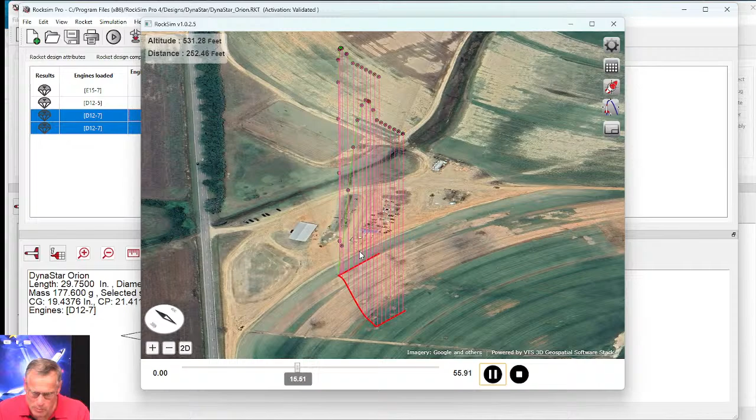We should see two trajectories taking off, and sure enough, we are. So here's the one that went south, and then here's the one that went straight up. You can see this is the ground path. And so now the parachutes on both rockets are out, and they're drifting down, kind of both falling at the same rate. So you see one trajectory over here, one here, and this is really cool.

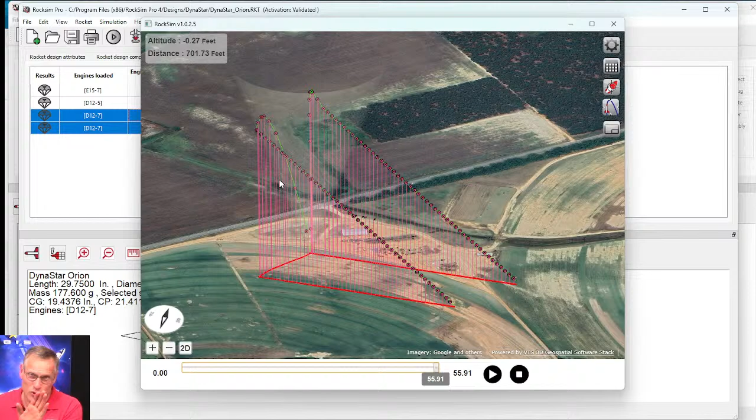So you can get a comparison of the two flights with different simulations. So the difference between these two flights was one launched straight up, one was angled at, or was it 13 degrees, kind of towards the southwest. And so that was what the trajectories look like.

This is not a feature in RockSim Pro right now. It's coming, as soon as the programmers get done with it. It looks to be working with single stage rockets, but not with multiple stage rockets. And until we get multiple stage rockets, we can't release it.

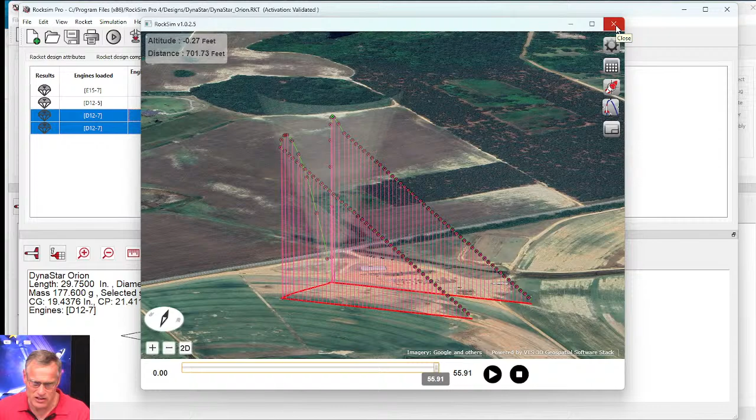The other thing it's going to do is there's this button right here, and the button is going to change. We don't know what the icon looks like yet, but for right now it's just a play button. What this allows you to do is, you buy these nice altimeters that record data, like a Featherweight Blue Jay, Featherweight Blue Raven, or the Featherweight GPS. All those devices store flight data, and you can use that flight data. Like, what do you use it for?

Well, this is going to allow you to load that data back into RockSim for the rocket. You'll click on it, and it's called Replay Your Flight, and you use this to show the flight in the 3D launch visualizer based on recorded altimeter or GPS data. Right now it only works with those three different Featherweight devices.

So you're going to select the altimeter data. Here is some altimeter data, and it's in CSV format, so comma separated values. I'm going to choose this one right here. This is how Featherweight stores the flight. So you give the rocket a name and the date. You launched this rocket December 21, 2024 at 10:27 in the morning, I think that was.

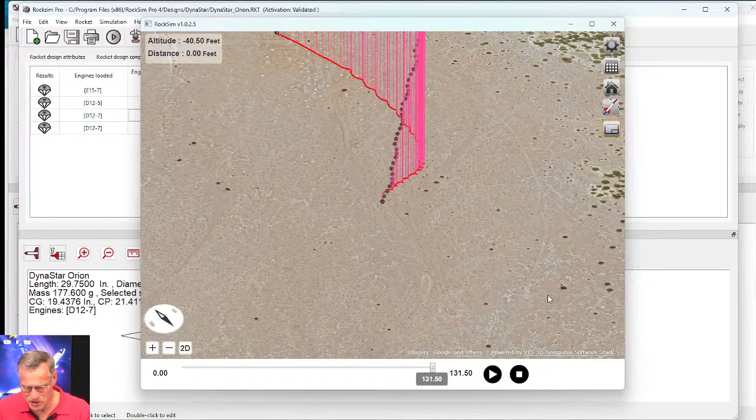And let's zoom out, turn this little window off. Okay, so this is the trajectory of the rocket. Let me turn off the weathercocking cone. And let's change the trajectory path from green to yellow, maybe yellow will show up a little nicer. Click OK. Yeah, it did. Okay, so here's the trajectory. Here's where it lifted off. The rocket went straight up, or not totally straight, but mostly straight. And then right here it hit apogee, and then it started coming down.

And remember, every one of these red dots is 1 second in the flight. If you look at the ground path, it's not a straight path, it's very curved. What's going on here is, on the way up, it was mostly straight in one direction, but then the wind started making it drift, and it actually curved. What actually happened is the wind at different altitudes in the flight was at different directions and different speeds, so you got wind going like this or going like this.

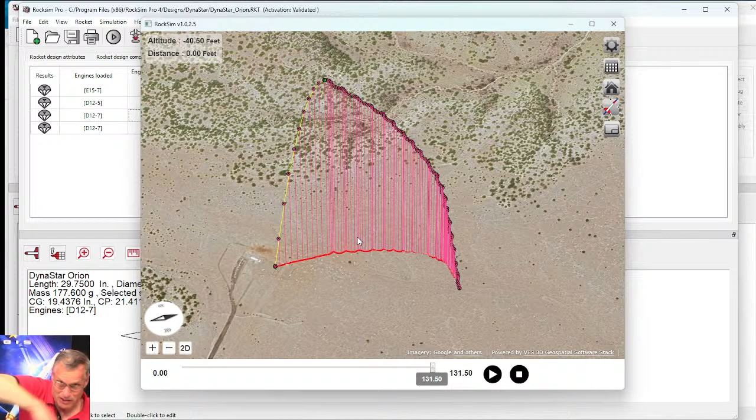And it's causing it to curve around. At the same time, the parachute, how parachutes never come down nice and straight, they always kind of spin around like this. So what's going on is the rocket is spinning underneath the parachute, and the parachute is kind of doing that too, and you get these circular gyrations as the rocket's coming down. If you look really close, you'll see that the path is spinning as it's coming down, because that's what the altimeter is recording.

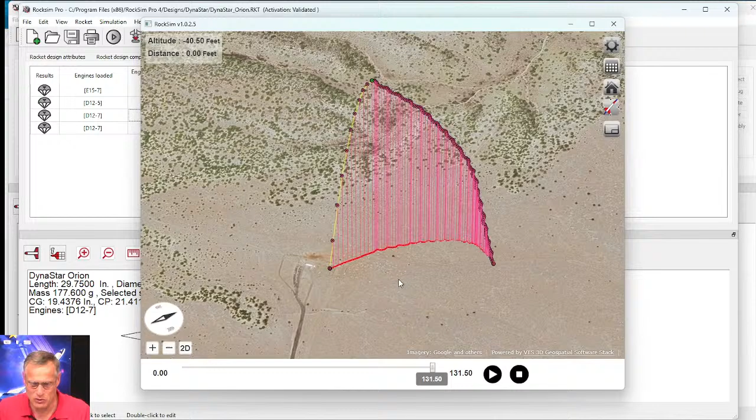So this is an actual launch of a rocket, but not this DynaStar rocket, it was a different rocket. I think it was a Black Brant. But you need a rocket to compare it against.

The other thing is, you've got this data, you can say, well, how accurate is RockSim? Let's compare this data to an actual flight. So then you open it up here, and it's looking at all these flights right here, and I could say, let's compare it to this flight. And then you hit replay flight, and it's going to show you both of those flights overlapped.

Although in this particular case, remember, the actual launch of the real rocket was in Pueblo, and the simulation we did was in South Carolina. So there's actually 2 flights here, but one is in South Carolina. I'd have to zoom really far out to see the one in South Carolina, which is like down over here somewhere.

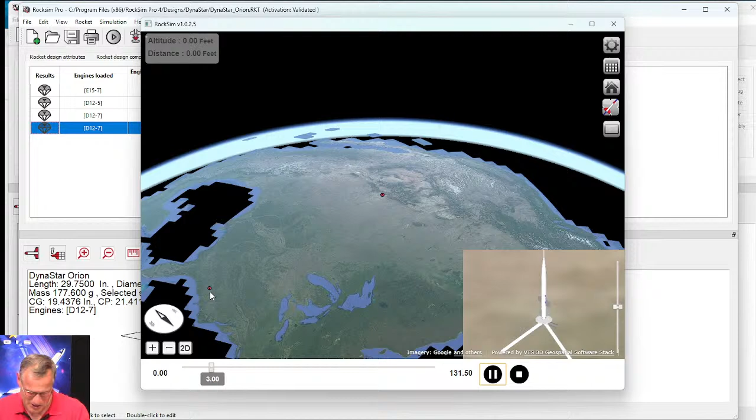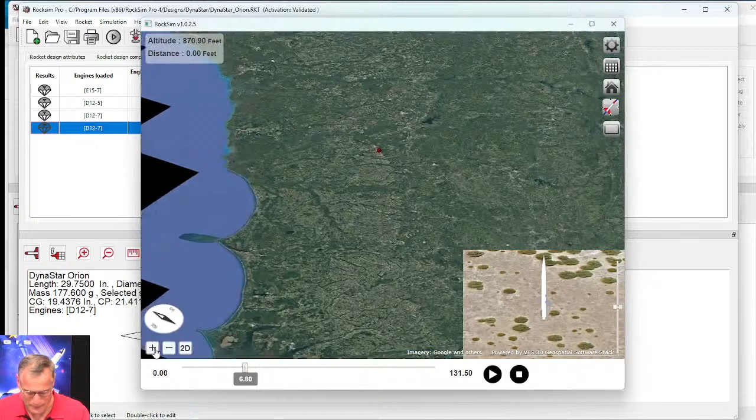See here's the red dot right there, that's where the other flight is. So if I zoom in on that part of the globe, and if I get that red dot, okay, so there's the trajectory of the one flight. But this is the RockSim trajectory that it predicted. Oh, then it switched me back to Colorado.

It's pretty cool. It does have some limitations. You got to know that when you're comparing two different flights, they better be launched at the same spot, or you're going to be switching between views.

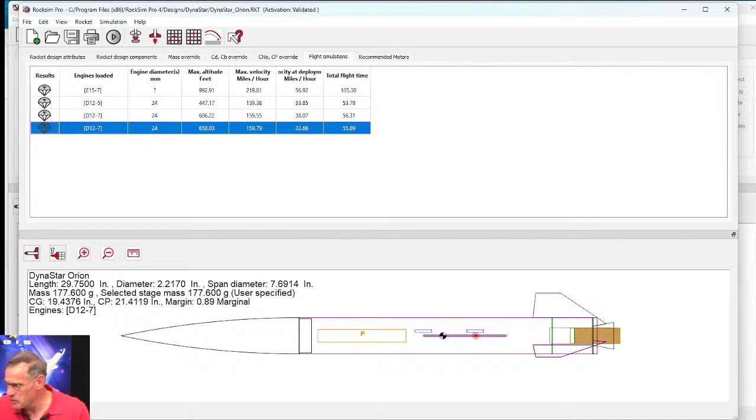Fat Bank says thanks, Tim. Carlos says the 3D part videos would be great. It's not like he'll be on a date. Reggie Morto says that's really cool. Carlos says if you print an entire rocket, please name it the Anvil. That's funny.

Okay, so we're well past 3 o'clock, but I had to show you those features that we're working on for RockSim Pro. That's the future, I think, is RockSim Pro, because it's in 3D.

You know, being able to see two flights going off at the same time, and you say, I angled this one X number of degrees, and this one went straight up, and what's the difference? That's the purpose of RockSim, to compare. What are we comparing? Comparing two simulations. Now we can compare a simulation versus actual flight data.

And that's going to be really interesting, because now you're going to be saying, how come they didn't match up? And so that's going to cause you to compare, right? Really cool stuff coming down the pike. You can get RockSim Pro right now, and as soon as those new features come out, you'll get an update notice, and then you just update it, and you'll be able to run them.